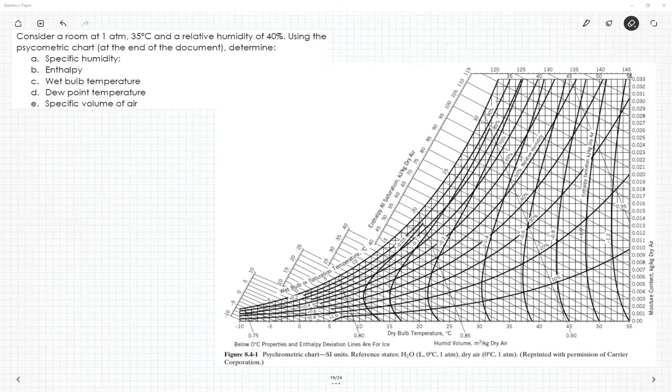Okay, guys. Well, we are going to start the class. A couple of things before we begin. The final exam, it doesn't change the dates. We are not going to have a departmental exam. We're going to have an exam with me and an exam with each professor.

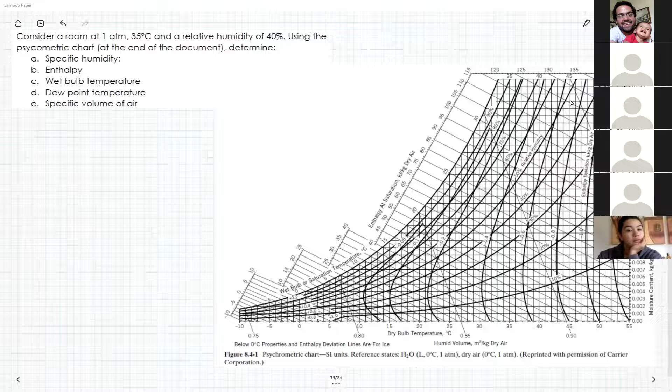Our exam is going to be on Monday, the 4th of December at 8 a.m. You have an announcement in your email right now that says the same thing. We don't know the place just yet. As soon as I know, I will let you know.

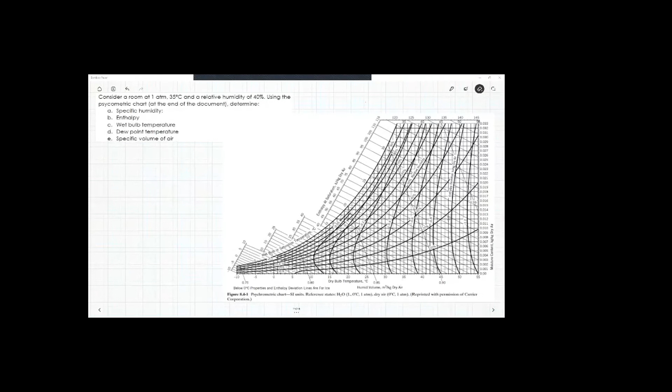Let me share the screen so you will see exactly the same thing as me. So this was the first problem, right? This one was just the use of the psychrometric chart. So we have to begin with the points that we have, with the information that we have.

The information that we have in this problem is that we have a room at 1 atmosphere, 35 Celsius. If the problem doesn't say what kind of temperature it is, if it's a wet bulb temperature or a dry bulb temperature, you have to assume that it's a dry bulb temperature.

You can't say that it's the wet bulb. And then it says that the relative humidity is 40%, right? So we have two different points for the diagram, and with those 2 points we can obtain everything else. If you read here in the diagram, you see in the x-axis you have dry bulb temperature. So we go to 35 and we select that temperature, 35.

And then relative humidity. If you see these percentages, 10%, 20%, the curves—these curves, you have 10% here, 20, 30, and so on, right? So that is the curve of relative humidity. In this case, it's 40%, so we have to choose this condition.

The 40 line, and we have to intersect it with the 35 Celsius dry bulb temperature. So this is the point that I'm drawing there. So that's our point. That's the conditions of that air.

So then we have to obtain all the other properties: specific humidity, enthalpy, wet bulb temperature, dew point temperature, and specific volume of air. The first thing is to obtain the specific humidity, or in this chart it says moisture content. You can see that is the specific humidity because it's in kilograms per kilogram of dry air.

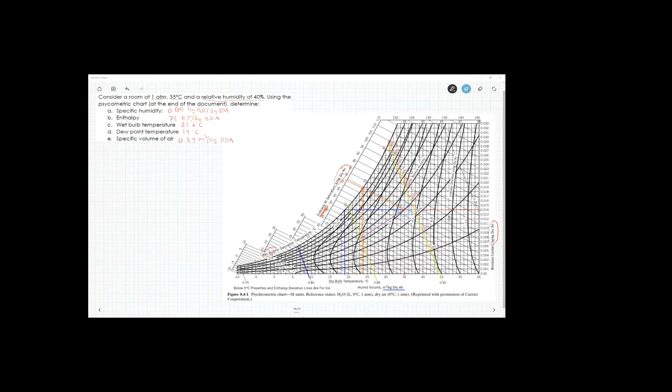So you're going to lower the temperature. You want to know at what point, when you lower the temperature, the air is going to be saturated, and at that temperature the system is going to start condensing. The water is going to start condensing after that temperature. So from that point I'm going to draw a new line, this time in green. We start from our point and reduce the temperature. We reduce the temperature until it reaches the saturation line, that curved line on the left. You see that new green line?

So at that temperature the system is going to be saturated, you can't dissolve more water at that temperature. So that would be the dew point temperature. To read it, you go down from that point to the dry bulb temperature axis and read the temperature there. At 19 Celsius, this particular system would start condensing. Okay, I get it now, thank you. You're welcome. Any other questions before we move to the next problem?

Okay, so this chart is particularly useful, but of course this only works for water and air. You can have this type of psychrometric chart for any mixture of a condensable vapor in a gas, but the usual thing is to have it for air.

The thing that is very interesting about this diagram is that you can obtain many properties. In this case, specific humidity, enthalpy, wet bulb temperature, dew point temperature, and specific volume of air by having two points of data, right? The dry bulb temperature and the relative humidity. So from those seven different variables, as long as you have two, you can obtain all the others. So it's a very powerful chart, and you can obtain it very quickly.

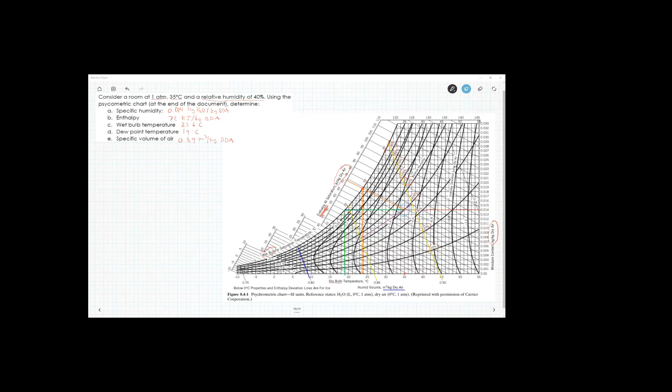Instead of using the equations, you can obtain any of these data using the equations that we saw on the presentation about multi-phase systems, but in this chart you can obtain it quicker than that. So it's very powerful. Okay, so that's that problem. Let me change to the next one and erase all those lines.

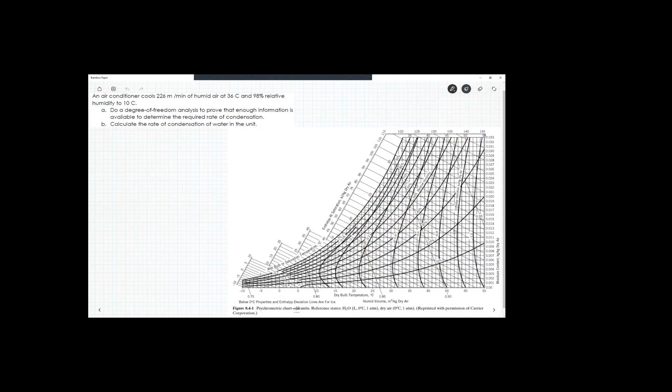Okay, so now we have a problem of mass balance. This problem, as somebody told me on the email, had a thing about the units. It says an air conditioner cools 226 cubic meters per minute of humid air at 36 Celsius and 98% relative humidity to 10 Celsius. So the first thing we need to do is a degree of freedom analysis to prove that enough information is available to determine the required rate of condensation.

Okay, so the condenser would be something very simple. We have an inlet, an outlet of humid air, and an outlet of water. This is the water that is being condensed.

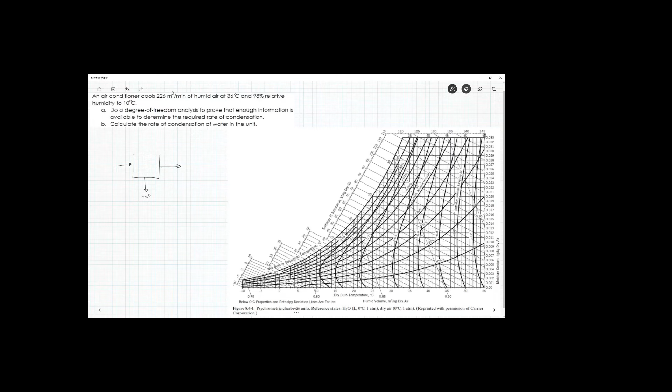So we have 226 cubic meters per minute of humid air that is at 36 Celsius and 98% relative humidity. And it says it goes to 10 Celsius, so we know that the outlet is 10 Celsius. So that is the information that we have. We need to obtain if this problem can be solved or not.

So of course we're going to have a mass balance, this is going to be bone dry air and water. And here we're going to have air, and we're going to have water too. So if you see these streams, it appears that we don't have too much information about the system. We don't know the fractions of water or air in any case, and we don't have the mass of water that goes out as condensate or the mass of air or water that goes out from the system. But we have a lot of information about the gas that goes into the system.

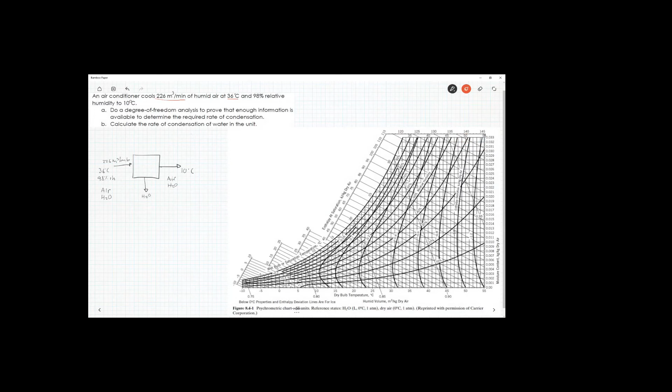So we have 226 cubic meters per minute of humid air that is at 36 and 98% relative humidity. So with those values, if you do a degrees of freedom analysis as we are now, without doing anything, the unknown variables will be one from the composition of air and the mass that is getting in, that's 2, 1 for the condensed water, that's 3, 1 for the amount of water on the outlet, and 1 for the mass in these streams. So we have 5 unknowns, and we only have 2 components. So we have 3 degrees of freedom.

So we can't solve that problem unless we do something else. And that something else is, well, use the psychrometric chart to obtain those values. With the 226 cubic meters per minute and the condition 36 degrees and 98% relative humidity, I'm going to draw those points. 36 degrees.

Again, it doesn't say if it's the wet bulb or dry bulb air temperature, so we have to assume that it's dry bulb. So I'm going to draw the point here, 36 Celsius. And then the relative humidity at 98%. So 98% is not in this chart.

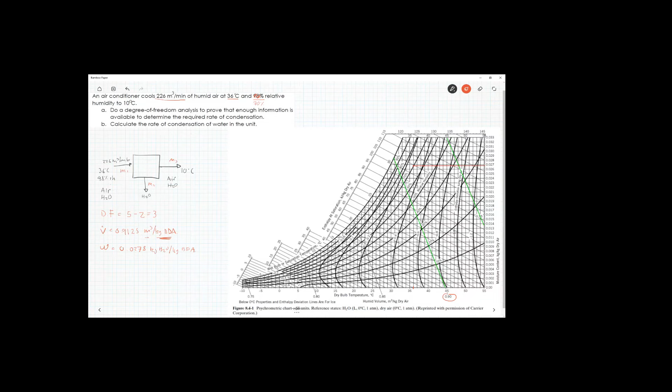And then we can obtain the dew point, the dew point temperature. Again, if we go to the saturation line, and then from that saturation line downwards, we are going to obtain that this is around 29.7. So the dew point temperature is equal to 29.7 Celsius.

And we can obtain, of course, the wet bulb temperature in orange. So we go from this point to the line, and then from that line downwards, and we obtain that it is 30.9. 30.9 Celsius.

Okay, so now we have enough information to obtain the data on the inlet, right? We have, with the specific volume, we can obtain the amount of air that we have, and with the bone dry air and the omega, or the specific humidity, we can obtain how much water, or the fraction of water, is in that air. Okay, so let me do that part.

So with this we have all the information about stream 1. If you follow the degrees of freedom, now that we have those two numbers, that is the mass, because we can obtain it through addition of 247.67 kilograms of bone dry air plus 6.88 kilograms of water, we are subtracting two variables, and now we're left with one degree of freedom.

But we can erase that degree of freedom. Let me clear all these things. So we reach again at our point. But now we want to see if we can obtain the properties of the air getting out of the system after the condensation happened.

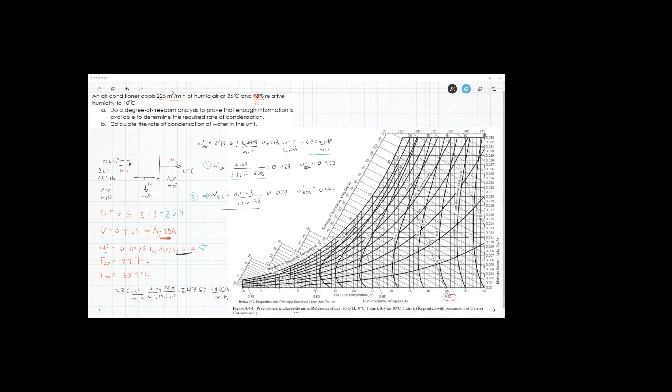So that bone dry air that we calculated already is the same at the outlet. But what we want to see is at what conditions of temperature and moisture content and so on do we arrive, to obtain a molar fraction of water. So we're going to follow the path of the problem: we start at our point, that is 36 Celsius and 70% relative humidity, and then we're going to cool it down, but we can't cool it down to any value we want.

Because when we cool it down, at some point we're going to reach the saturation line. At that saturation line, the system is going to start condensing. So if that happens, the system is going to follow the saturation line, because you have a saturated system, and it's going to start following the saturation line, that is this curved line over here. So it's going to be saturated until we reach the 10 Celsius mark, because that's the temperature in the outlet. We know that this system must be completely saturated because we are dropping the temperature a lot.

This over here, down here at 10 degrees and at the saturation line, that's our outlet in this case. We follow the saturation line, so at that point we can obtain the specific humidity. So the specific humidity at the outlet, omega in the outlet, that is the third one, is going to be 0.0078 kilograms of water per kilogram of bone dry air.

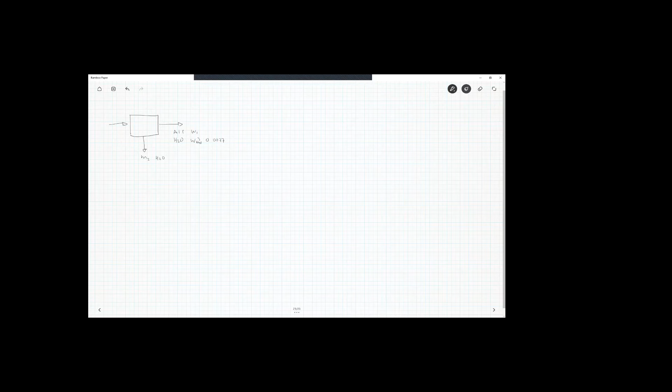So we have our condenser, we have our inlet, our outlet, and we have here M2, that is just water. We have here air, we have here water, and that particular value, the molar fraction of water in stream 3 is 0.0077. Of course, the molar fraction of bone dry air would be the subtraction of that, so 1 minus 0.0077 is 0.9923.

And we have the values for the first part too, that is for the inlet. The fraction is 0.027 of water, this is water in stream 1. And air, bone dry air in stream 1, is equal to the subtraction of that, that is 0.973.

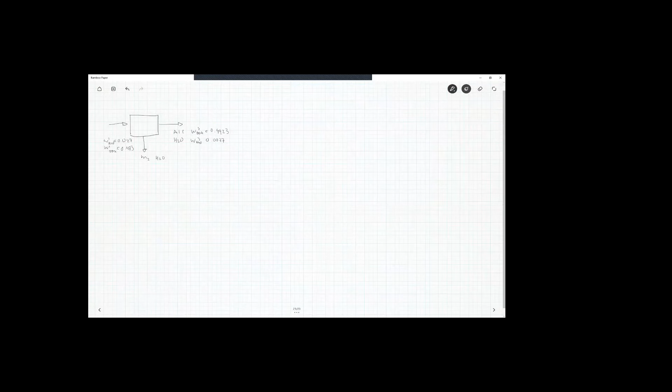And we have the last part of our system, M1 and M2. M1, of course, we can obtain it, let's just do the addition. The M1 is going to be 247.67 plus 6.88 of water, that is 254.55 kilograms per minute.

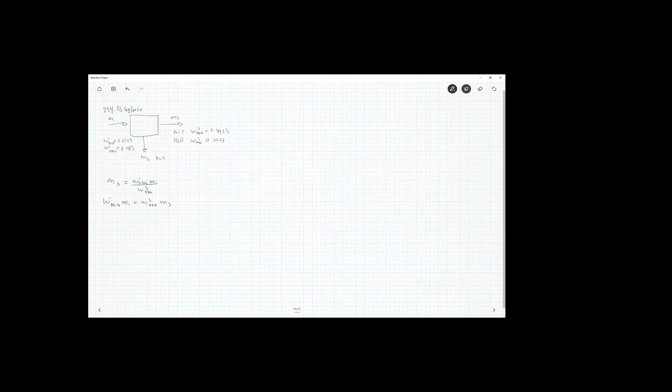And we can obtain M3 doing a calculation too, because we know that the mass fraction of bone dry air in 1 times M1 has to be equal to the bone dry air in the third one times M3. So we can obtain M3 as the mass fraction of water, well, of bone dry air, times the mass of the current, divided by the mass fraction of bone dry air in stream 3. We have all that data: 0.973 times 254.55 divided by 0.9923. Let me do that calculation very quickly. This gives us 249.59.

249.59 kilograms per minute. So now we have M1 and M3, and we're only missing M2. Of course, if we use the global balance, M1 should be equal to M2 plus M3. So M2 is equal to M1 minus M3.

We substitute the values to obtain the amount of water that was condensed. M1 we said was 254.55 kilograms per minute, and M3 is 249.59 kilograms per minute. That gives us M2 equal to 254.55 minus 249.59, which is 4.96 kilograms of water per minute.

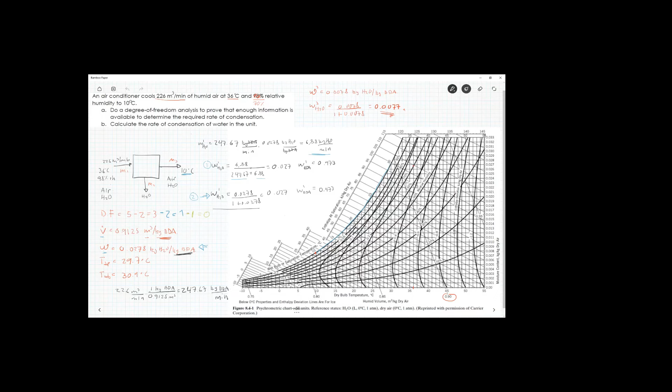Omega 1 is equal to 0.0278 kilograms of water divided by kilogram of bone dry air. And omega 2 is equal to 0.0078 kilograms of water divided by kilogram of bone dry air.

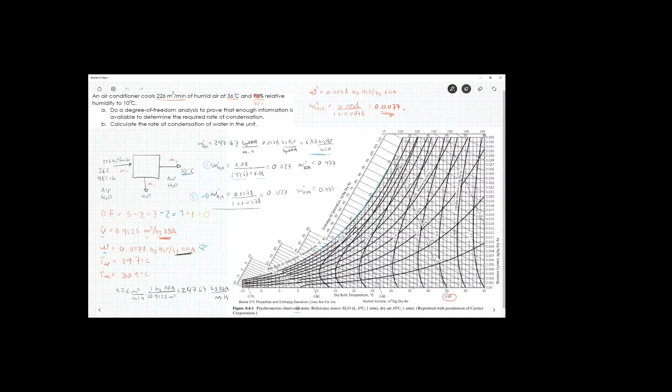And we know that the amount of bone dry air is 247.67 kilograms of bone dry air per minute.

Okay, if you pay attention to these two values, the two omegas, the two specific humidities, they're telling you it's per kilogram of bone dry air. That value is not going to change at all in the inlet and the outlet. We need to do conservation of mass, and if we're only condensing water, the bone dry air should stay the same. So what we can do is use these two values to tell us the difference in amount of water in the inlet and the outlet, by taking delta omega, the difference between one and the other.

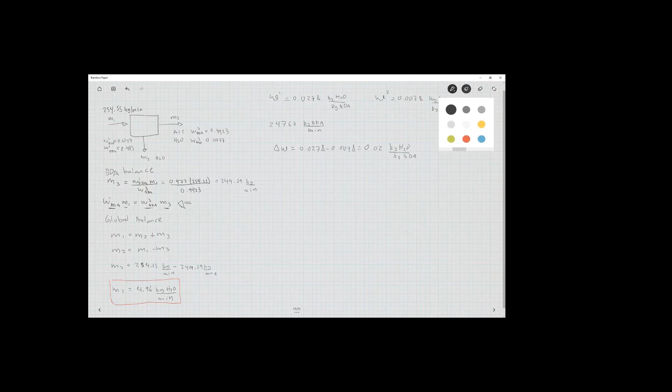In this case, 0.0278 minus 0.0078 gives us 0.02 kilograms of water per kilogram of bone dry air. This is telling us the amount of water that's going to be exchanged between the inlet and the outlet, and that water is going to go to the condensate in M2.

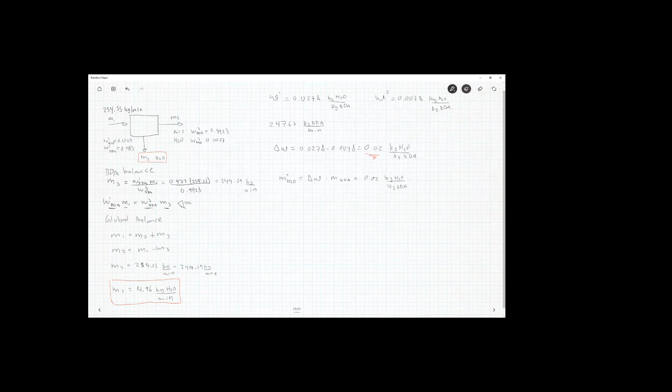So if we know the amount of kilograms of bone dry air, we can obtain the mass of water in stream 2 as the difference, this delta omega, times the mass of bone dry air. In this case, 0.02 kilograms of water divided by kilogram of bone dry air times the mass of bone dry air, 247.67 kilograms of bone dry air per minute.

So we cross the units and obtain that the water using this method is 247.67 times 0.02, which gives us 4.9534 kilograms of water per minute. If you see these two values, they are a little bit different, just a tiny smidge, because we used different decimals in the long process and didn't use all the decimals. So this was the value for the long method, and this value is using the short method.

Of course it's easier to do it with the short method, and I encourage you to use that one because it's a lot quicker. That's why every property in that psychrometric chart is in kilograms of bone dry air, because it's very easy to obtain the masses. Do you have any questions on how I arrived at the mass of water using the short method or the long method?

I have a question. Why do we have to have a delta omega? Because that change in the specific humidity from the inlet is the water that was transferred to the condenser. You had air with high humidity, 0.0278 kilograms of water per kilogram of bone dry air, and you condense a lot of water on that air, reaching a value of specific humidity of 0.0078 kilograms of water per kilogram of bone dry air. So the difference between those two numbers is the water that was condensed. That's why I use that delta.

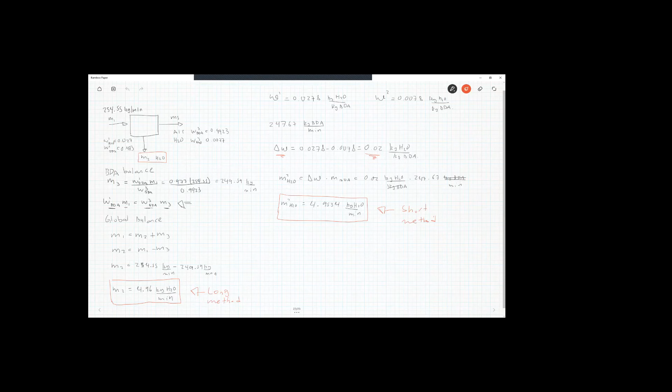The first thing to do is to know what kind of process we have here. So the first thing is that we have a continuous dryer. We're going to draw a continuous dryer, and it says that air enters, blah blah. So we're going to have an inlet. If you remember, you should have seen the different kinds of operation units with Hugo.

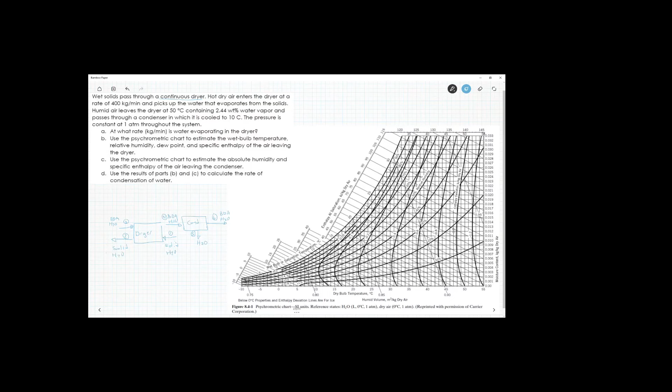So it says that hot air goes into the dryer at 400 kilograms per minute, that's the mass, and pick up the water that evaporates from the solid. Humid air leaves the dryer at 50 Celsius and a weight percentage of 2.44 weight percentage, and passes through a condenser where the temperature is dropped to 10 Celsius.

In this particular process, it seems like you need to... well, let me explain first the psychrometric part. We have air that is going to have 50 Celsius and 2.44% in weight of water. So we want to trace the system. The 50 Celsius we have here in the psychrometric chart, in blue. But what other point do we have in that diagram? We don't have any at this particular time.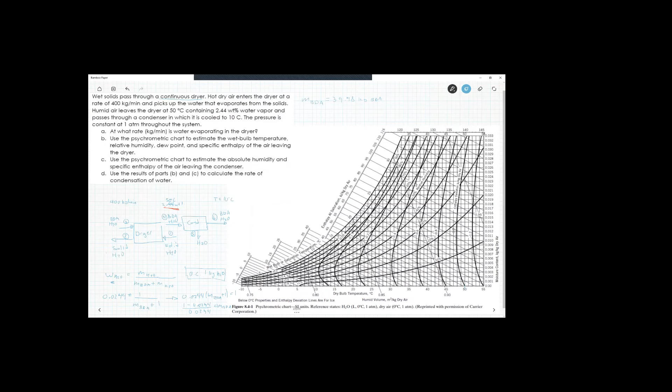Okay, thank you. So now we have the kilograms of bone dry air and the kilograms of water, because we assumed 1 kilogram. So omega in that case would be the amount of water, which we said was 1 kilogram of water, divided by the 39.98 kilograms of bone dry air. This divided by 39.98 gives you 0.025.

0.025. So this is the specific humidity of that air that is leaving the dryer. Everybody agrees? So we have this value, and that value we can find it on the psychrometric chart. We have the 50 Celsius, and now we have the specific humidity that is 0.025.

So we go to the 0.025, and we see where those two lines meet. Let me draw a line. We start at 50 and we go up the whole way, and then we start at 0.025 and we cross it. So our point will be the intersection of those two, the blue dot over here. That would be the conditions at which we have the air in the dryer, after the dryer.

And again, we're going to do a process similar to the one that we did for the previous problem. We have to obtain the conditions at the exit. So again, we need to draw a line from that point, reducing the temperature until the saturation point. Well, we do that line.

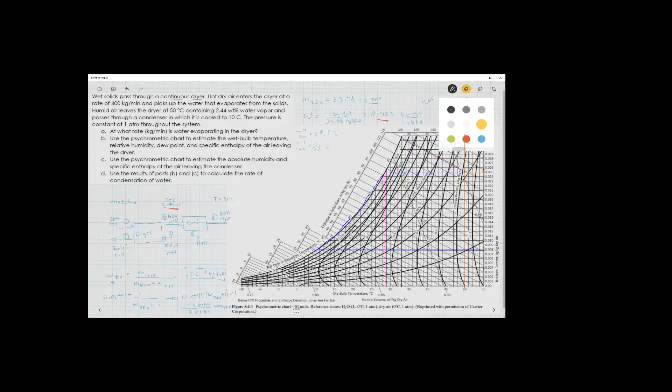33% relative humidity. The dew point, specific heat, specific enthalpy - we can follow the purple line I drew until we reach the enthalpy line, and that enthalpy line would be 115, 16, 17. Let's say that specific enthalpy is 117 kilojoules per kilogram of bone dry air. That's it - specific enthalpy of air leaving.

Okay, so to solve part C, we did already. We used it to estimate the absolute humidity, which we said was 0.0078. A specific enthalpy leaving the condenser - okay, so we have that part now. We have the weight percentage of solids and so on, and then we have to solve the dryer first.

So it says wet solid passes through a continuous dryer. Hot air enters the dryer at a rate of 400 kilograms per minute and picks up... this was bone dry air. So we know that this bone dry air that goes into the dryer should be equal to the bone dry air that leaves the dryer in 4, and that should be equal to the bone dry air that goes in 6.